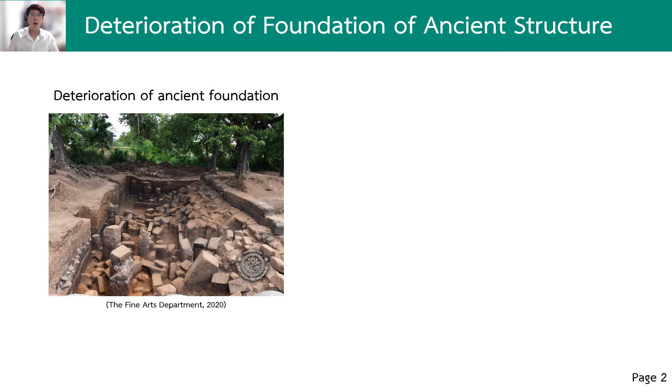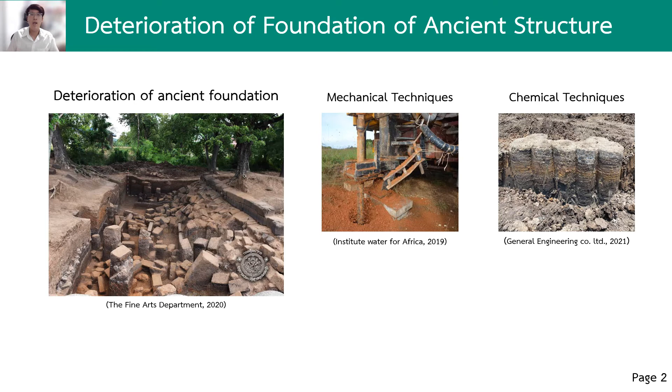The organizer expects to use all the civil engineering knowledge in the preservation of the ancient sites, but the ancient site is under the authority of the Fine Arts Department for acting on the structure or conducting activity that has impact on it by producing vibration or employing chemical methods that have impact on the region surrounding the ancient site. As a result, there are numerous constraints in terms of maintenance.

But nowadays, there is alternative technology to help improve the soil quality, including the porous structure: microbially induced calcium carbonate precipitation, or MICP. It is a biotechnology used to increase soil strength by bacteria that can produce calcium carbonate from the enzymatic degradation of urea.

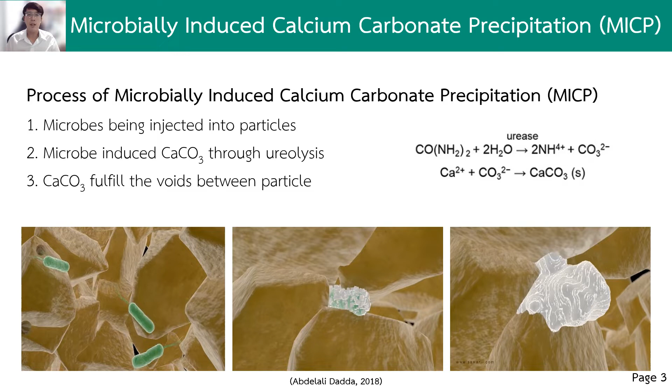The resulting calcium carbonate fills the void between the soil particles. The calcium reacts with the carbonate ion, which is also a product of the bacteria, and finally they combine and precipitate as calcium carbonate, as the equation shown in the slide.

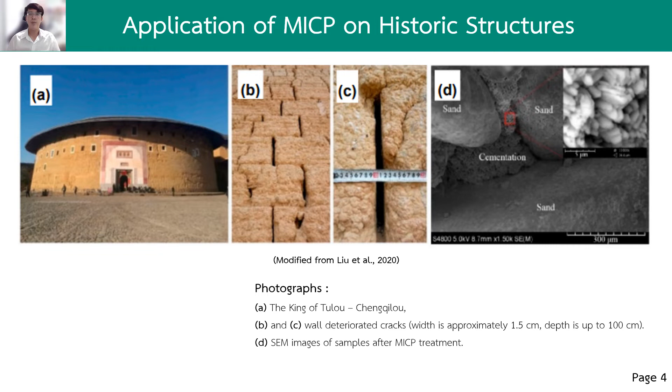Apart from applying MICP technology to improve soil quality, MICP has recently been adopted for some kinds of building structures, such as roof tiles or ancient wall treatment. But there is still no application to the foundation, and there has previously been no research into the coexistence of local microorganisms that may affect the activity of the MICP process.

Therefore, our project explores the possibility that the MICP technique can be applied to treat the ancient foundation by using calcium carbonate to fill the pores, and we expect that the masonry performance will be increased.

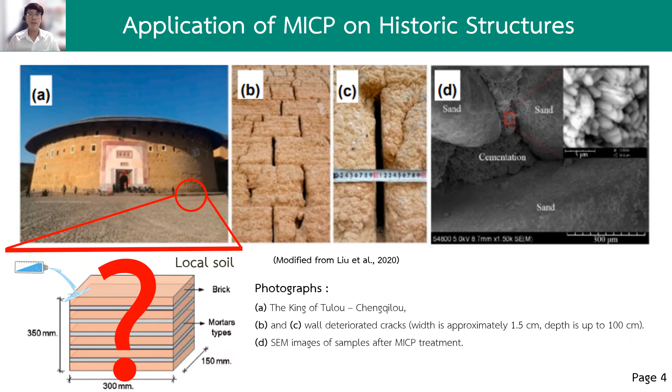The objectives are to apply the MICP technique on the foundation of a historic structure, and to investigate the effect of local microorganisms in the local soil on MICP effectiveness.

Scope of the research: the local sand is from a site near the historical monument in Lopburi, and the ancient bricks are made by cutting masonry brick into 5 x 5 x 5 cm. The ancient mortar refers to the mixture proportion that has been certified by the Fine Arts Department. The microorganism used in the research is Lysinibacillus sphaericus strain LMG22257, which past studies found can produce carbonate.

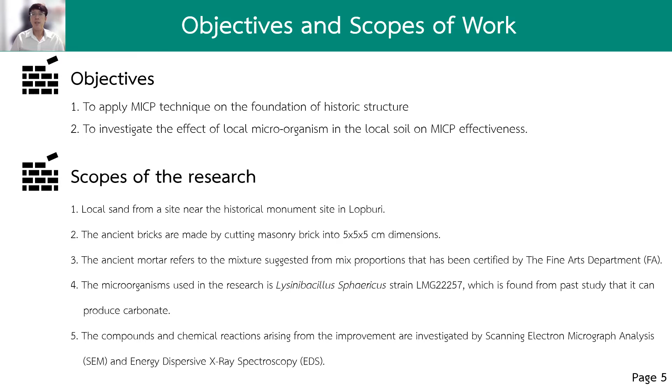And lastly, the compounds and chemical reactions arising from the improvement are investigated by scanning electron micrograph analysis, or SEM, and energy dispersive X-ray spectroscopy, or EDS.

Before launching the experiment, this is the step to choose the type of microorganism. Lysinibacillus sphaericus LMG22257 was chosen to be cultured for MICP. The reason is that this strain has recently been utilized to induce calcium carbonate precipitation in the construction field, due to its ability to release high urease enzyme within a few hours after incubation.

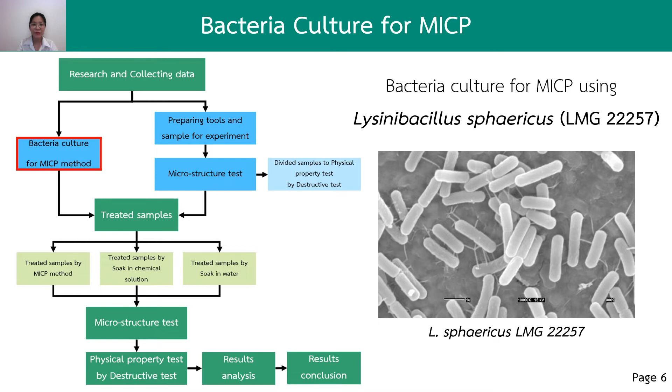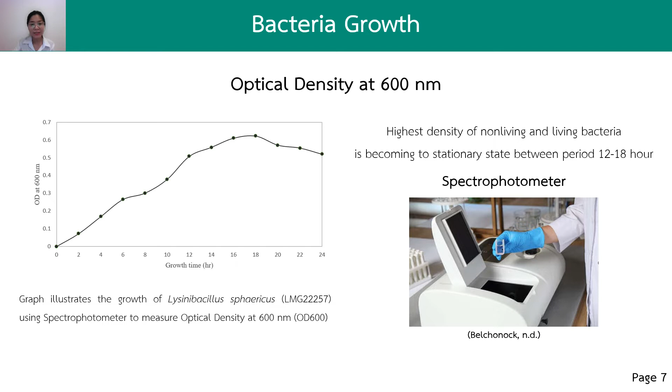And here is the graph that shows the reproduction ability of LMG22257 in terms of OD600, which is the optical density of living and non-living bacteria measured at a wavelength of 600 nanometers by spectrophotometer. We can notice that with every increasing hour of incubation, the density of bacteria increases, entering the stationary phase between 12 to 18 hours.

However, this bacteria is commonly used to produce the enzyme urease for MICP. So the urease test was prioritized to set up the most effective urease activity conducted by only living bacteria. The objective of testing the urease activity is also to choose the best incubation hour at which the bacteria can release the most enzyme.

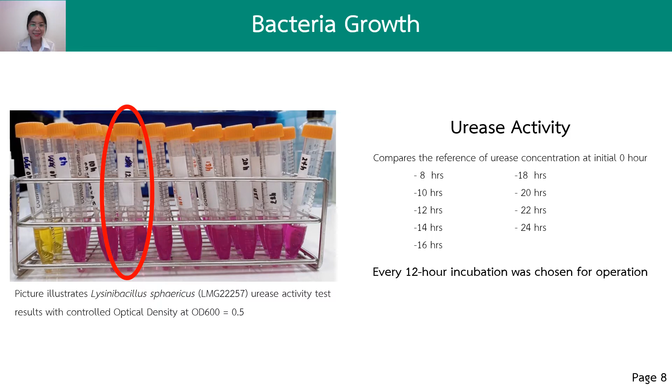To imitate the ancient masonry, we prepared a sample that had non-perfectly cut brick with the surface detailing and mortar samples, then embedded in the sand derived from a site near a historical wall in Lopburi. The local sand will be separated into two cases.

Case 1, the local sand that was sterilized at 121 degrees Celsius, and Case 2, the local sand that remained the same condition. The reason is to see how well pure strain LMG22257 performs on sterilized sand without any local bacteria, and compare the result to the local bacteria working with LMG22257.

Additionally, to treat MICP, we must combine the water, chemical solution, and bacteria in a single container for the reaction, and this causes the performance to be difficult to evaluate due to a variety of factors. So we divided the container into three conditions, which are MICP treatment, pure chemical soaking, and water soaking.

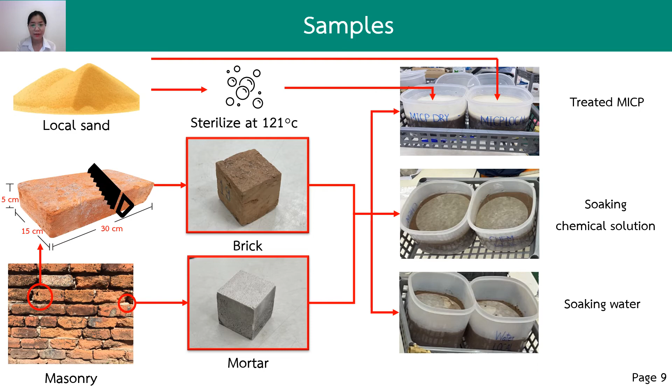After 2 cycles of treatment a day for 18 days, we could see that calcite appears on the surface of both local sand and sterilized local sand at about the same level. It's possible to conclude that LMG22257 can precipitate calcium carbonate and works well with local bacteria.

The additional result is on the chemical soaking condition. There was an appearance of calcite on the top surface of local sand. In contrast, mineral precipitation was not visible on the top surface of sterilized local sand. This implies that the bacteria living in the sand near a historical wall in Lopburi have the potential to produce calcium carbonate when soaked in a chemical solution. For the water soaking condition, there is no mineral appearance. It was only used to study the effect of water on MICP samples.

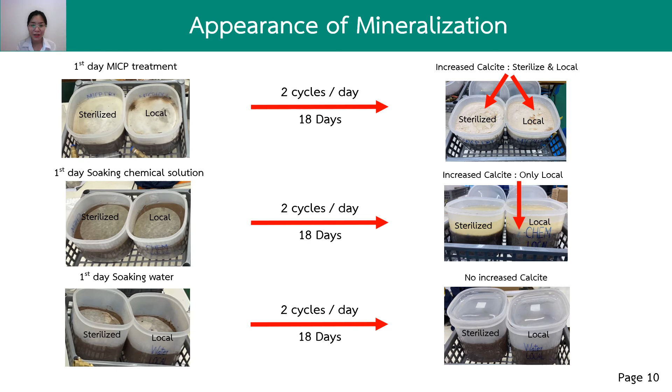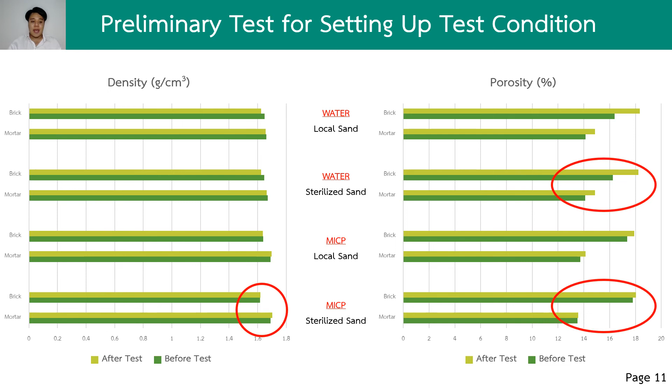As shown in bar charts, where dark green shows values before test and light green shows values after test, samples submerged in water have decreased densities and increased porosities. On the other hand, samples submerged in MICP have significantly increased densities and porosities when compared with samples submerged in water. So, the results show that MICP helps to increase densities and contributes to slow the increase of porosities in bricks and mortar.

Calcite sedimentation on the surface of samples after the MICP process can be verified by using a scanning electron microscope, or SEM. As you can see in the two pictures above, calcite elements are seen on the surface of samples submerged in sterilized sand and local sand. So the samples of sand were taken to verify as well, and it showed that the sand has calcite elements along the surface too.

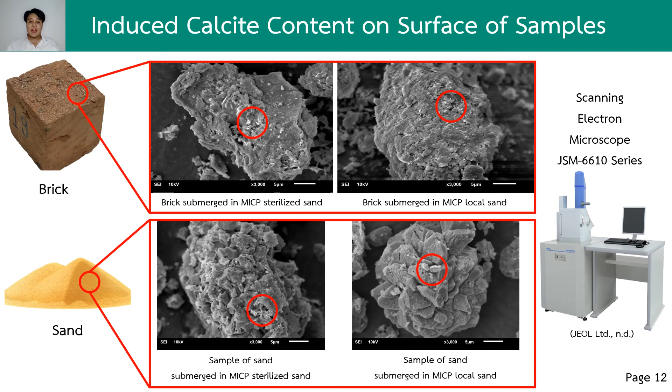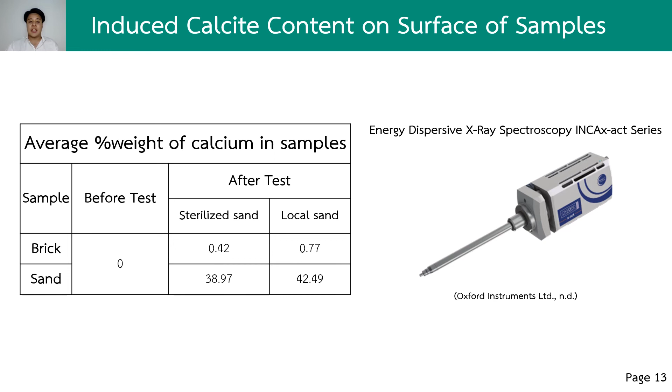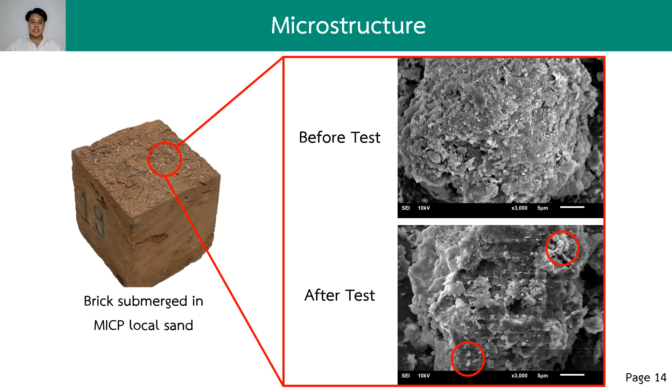Then the samples were taken to measure the difference in surface height after test by the average level of the surface of each sample, measuring the height difference from a reference box. The results show that all samples had an average height increase of 1,000 micrometers, or 1 millimeter.